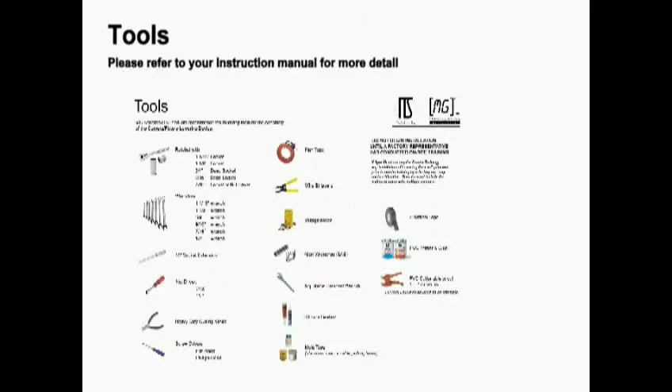MG2 and ITS Products recommends the following tools for the assembly of the camera fixture lowering device. More details on these tools can be found in the written instructional manual.

For the installation of the camera lowering device, you will need the following materials: the camera lowering device, or CLD for short, with the conduit mount adapter, the pole top junction box, the camera junction box, and 4 circular camera junction box weights. All 4 of these weights will be needed.

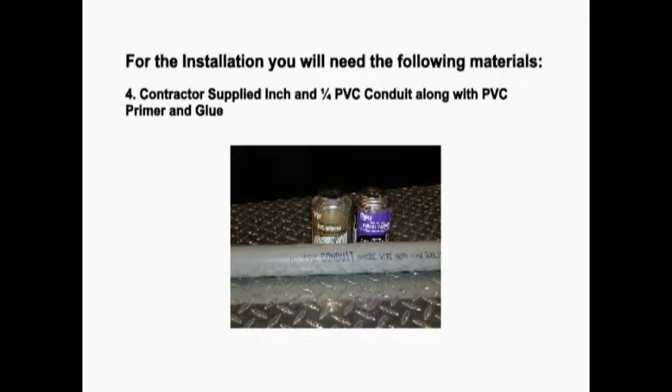The contractor supplied 1 1/4 inch PVC conduit along with PVC primer and glue. Power signal cable, either user supplied or the optional MG2 composite cable. The lowering tool winch will be needed to complete the full installation of the camera lowering device. And of course, a pole along with the pole top tenon and hardware.

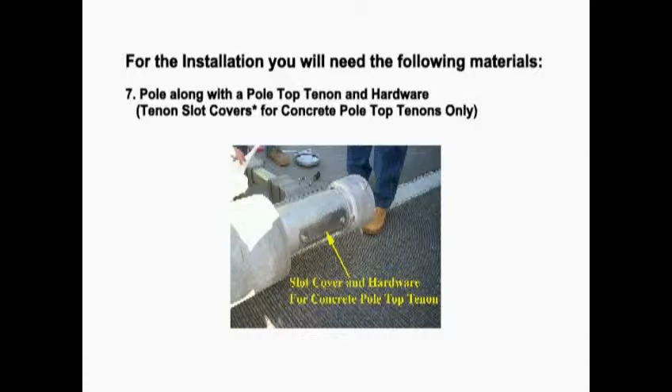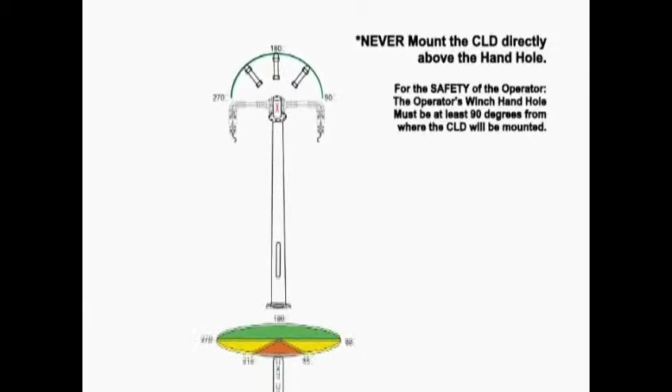Start with the pole in a horizontal position with the top of the pole ideally 3 feet off the ground. Please make sure that the handhole is accessible. Please note, never mount the CLD directly above the handhole. For the safety of the operator, the winch handhole must be at least 90 degrees from where the CLD will be mounted.

Take a look at this diagram for an example. Other pole-mounted equipment such as pole-mounted cabinets, detectors, antennas, RTMS, and other materials must be mounted keeping this safety requirement in mind. To start, let's bolt on the adjustable tenon.

Some tenons may come pre-installed. Be sure that all bolts are tight, and be sure that the tenon slot is aligned to the desired location in relation to the handhole. Here we'll see a field installation of a tenon to a concrete pole. Attach the 4 bolts and the included hardware from the pole manufacturer.

Tenons are slotted in order to give you many degrees of play. Assemble the 1 1/4 inch PVC conduit, the length from the handhole to the pole top, using PVC primer and PVC glue, and allow to dry.

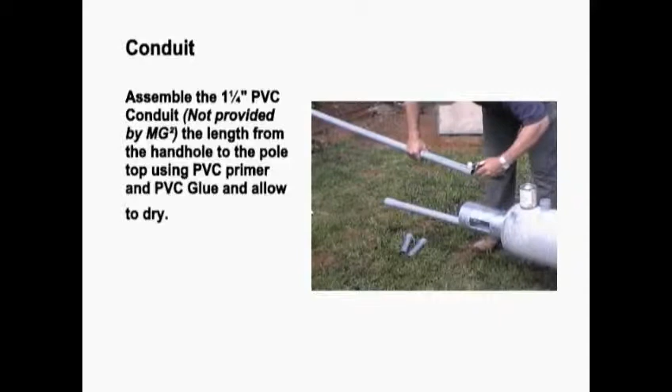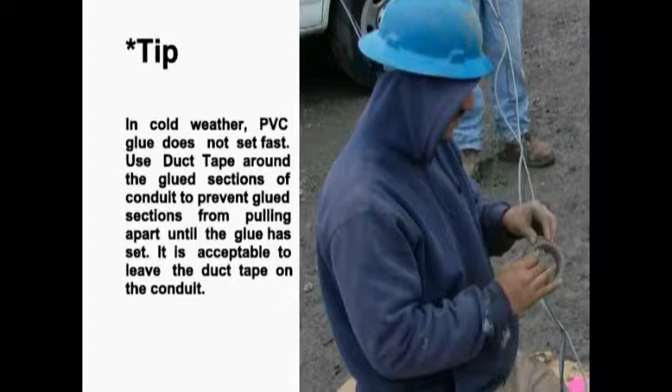Tip: in cold weather, PVC glue does not set fast. Use duct tape around the glued sections of the conduit to prevent glued sections from pulling apart until the glue has set. It is acceptable to leave the duct tape on the conduit. Assemble the provided 1 1/4 inch rigid conduit fitter to the top of one section of the PVC conduit using primer and glue. Allow to dry.

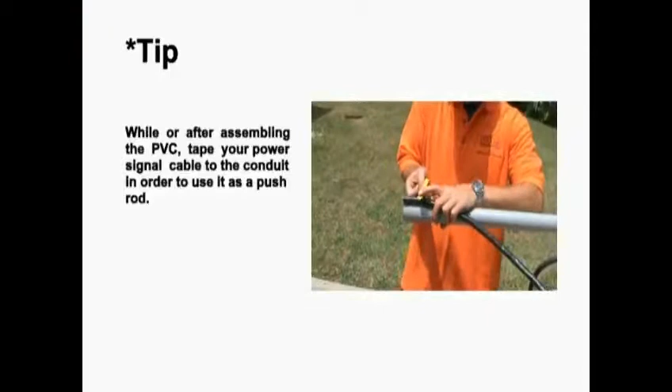It is not required at this part of the installation. However, while assembling the PVC, tape your power signal cable to the conduit in order to use it as a push rod. This will save a step later on in the installation.

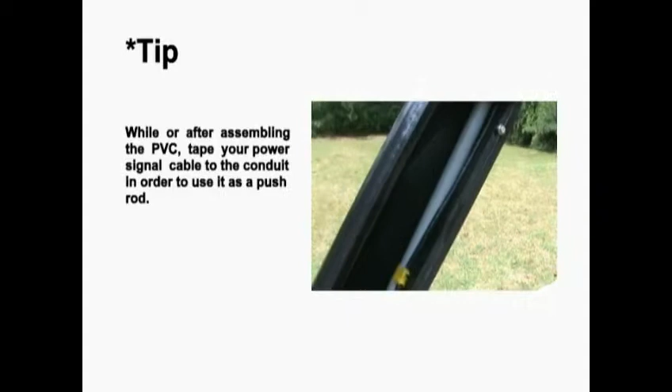Now, feed the conduit through the tenon and down towards the handhole. Continue feeding the conduit down the pole until the hole on the rigid conduit fitter is aligned with the bottom hole on the tenon with the slot.

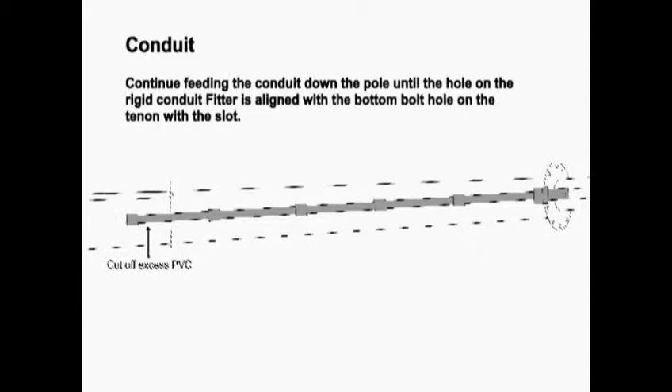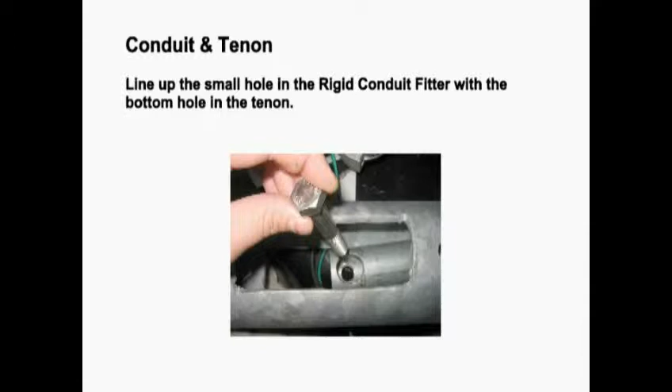Now remove the bolt, nut, and washer from the bottom hole of the CLD. Line up the small hole in the rigid conduit fitter with the bottom hole in the tenon. Temporarily attach the rigid conduit fitter to the tenon by inserting the bolt through the large hole on the fitter and securing with the bolt and washer.

Mark the conduit flush with the top of the handhole and cut off the excess PVC.

If a bell coupling was provided, glue the bell coupler onto the conduit.

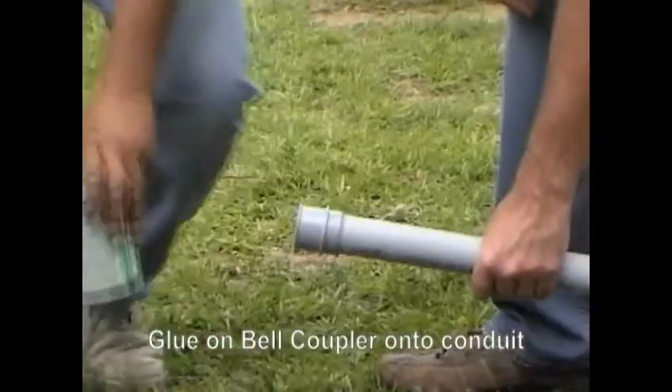Reinstall the conduit and temporarily reattach the rigid conduit fitter to the tenon by inserting the bolt through the large hole on the fitter and securing with the bolt and washer.

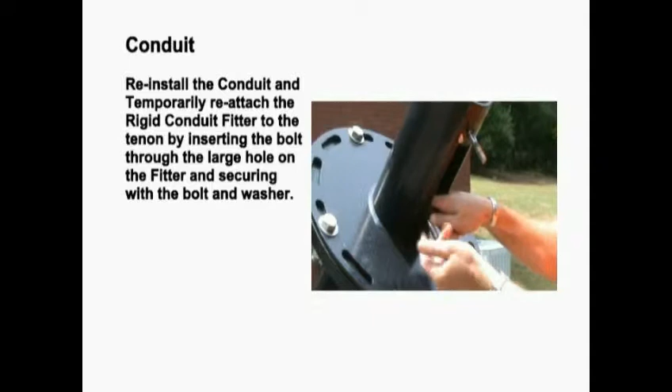Now it's time to fetch the CLD and place it next to the pole top tenon near the slot where the CLD will be mounted.

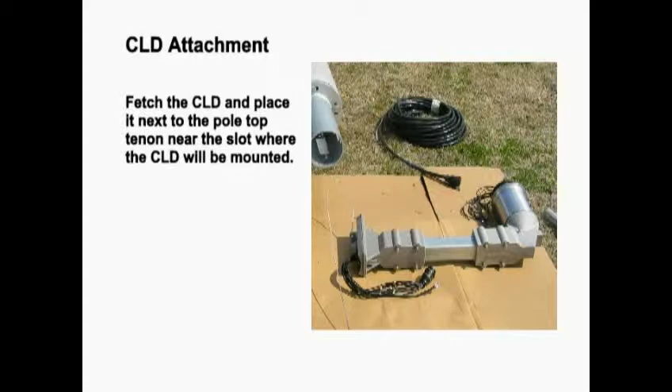Be sure to keep the CLD clean and clear of dirt and debris, which can foul the locking mechanism.

Locate the stainless steel cable attached to the CLD. Unroll the stainless steel cable in a hand-over-hand method to avoid curls in the cable. Curls or kinks in the stainless steel cable can prevent the device from functioning properly.

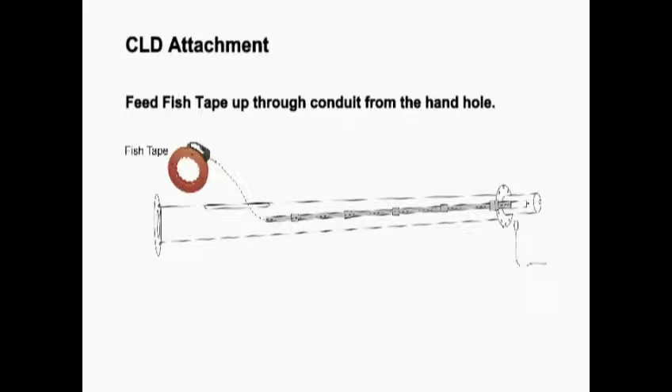Feed a fish tape up through the conduit from the handhole. Bring the end of the stainless steel cable back to the tenon and thread the thimble end with a quick link through the slot in the tenon and pull down through the fitter conduit. Remember, take the stainless steel cable through the slot in the tenon.

As the fish tape pulls the stainless steel cable down the conduit, it will be necessary to lift the CLD and begin to attach the arm to the tenon. While doing this, several procedures must occur.

Remove the nut, washer from the bottom bolt that is threaded through the conduit fitter tenon. Remove the top bolt, nut, washer from the CLD.

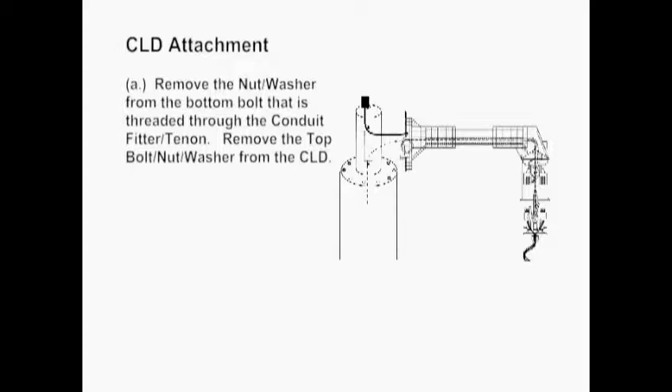Next, you will need to ensure the electrical conductors in the arm pass through the slot and out of the top of the tenon. You will attach the CLD to the tenon with the bolts provided. Bolts go on the inside of the tenon and nuts go on the outside of the tenon.

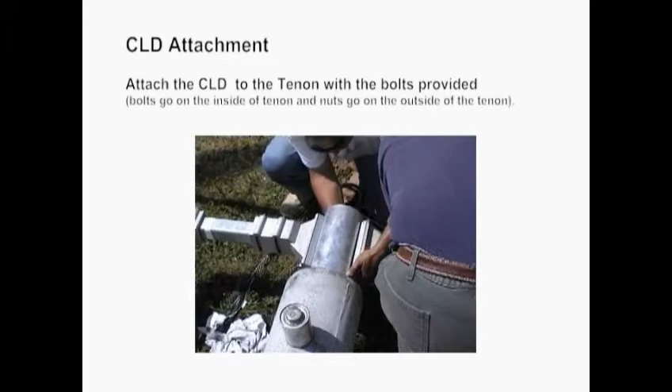Be careful not to pinch conductors or the stainless steel lowering cable.

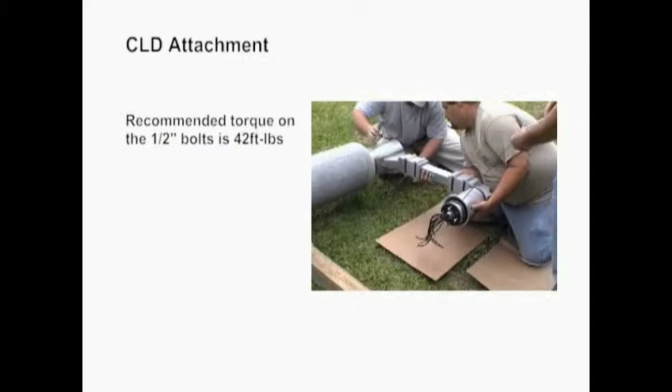Insert a finger through the pole top tenon into the conduit mount fitter and place it between the stainless steel cable and the bottom bolt. This will ensure that the stainless steel cable is not pinched behind the bolt.

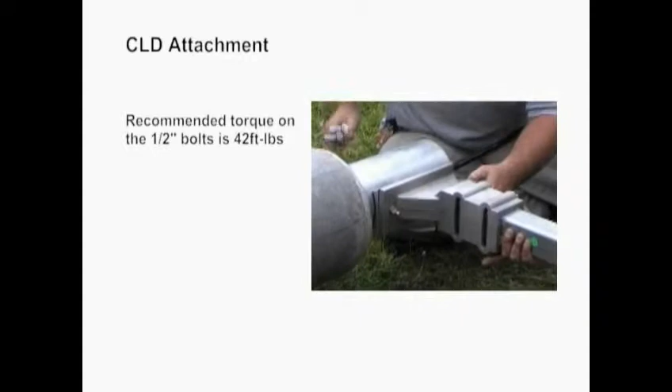Once the stainless steel cable is pulled through the conduit, immediately attach the quick link to the parking stand.

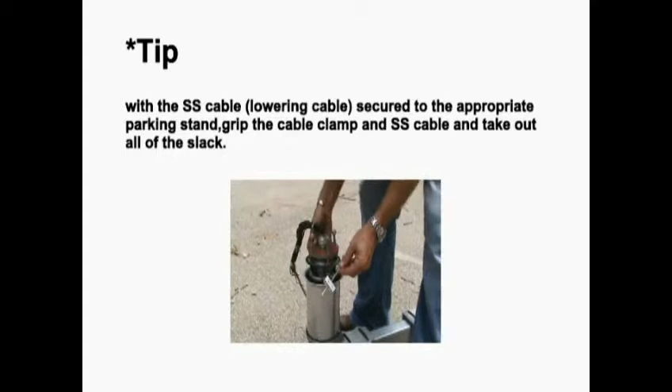Detach the bottom contact unit from the upper unit by pulling down on the contact and locate the cable clamp at the end of the stainless steel cable. With the stainless steel cable secured at the appropriate parking stand, grip the cable clamp and stainless steel cable and take out all of the slack.

With the slack out and slight positive tension on the lowering cable to keep it on the pulleys, push the bottom contact unit back into the bell until the rubber gasket around the bottom unit is in contact with the bell. It is not necessary to latch the unit.

If you have not already done so, remove the stainless steel cable from the fish tape once the CLD is attached and connect the quick link onto a parking stand. If using multiple CLDs, connect the quick link onto the parking stand located in the closest vertical plane as the camera lowering device orientation.

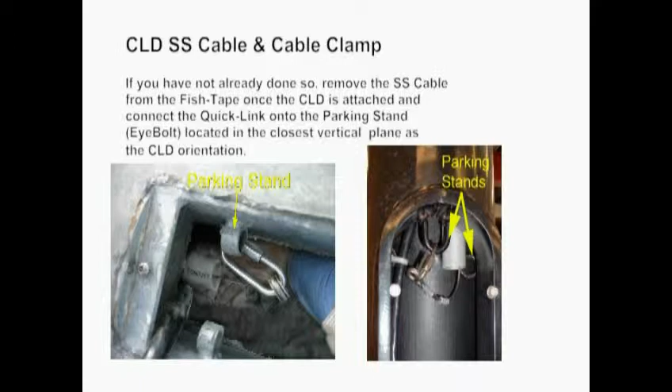Do not install the camera junction box until the pole is erected and set. Installing the camera junction box prior to setting of the pole may damage the alignment probe and void all warranties.

Now that the lowering device is attached to the tenon and the quick link is attached to the appropriate parking stand and secured, detach the bottom contact unit from the upper unit by pulling down on the contact and locate the cable clamp at the end of the stainless steel cable.

Grip lower contact with fingers and use thumbs to push against the bell housing to release the contact.

Units are shipped unlatched from the factory. However, if the contact unit is latched, you will need to push the contact unit up and then down to unlatch, and then pull the unit out. Please see the instruction manual for detailed information on this process.

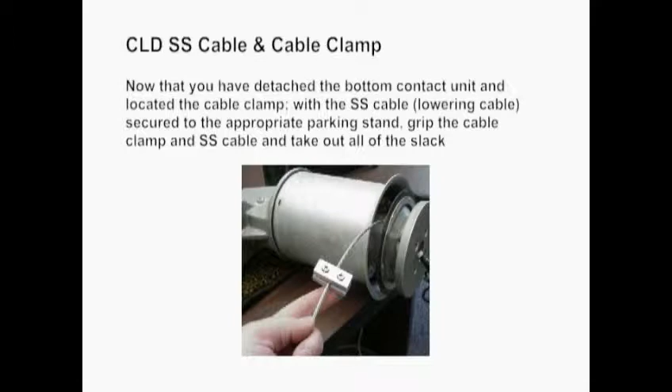Now that you have detached the bottom contact unit and located the cable clamp, with the stainless steel cable secured to the appropriate parking stand, grip the cable clamp and stainless steel cable and take out all of the slack.

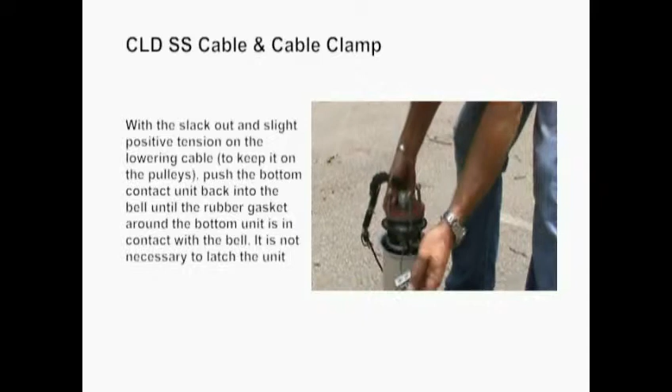With the slack out and slight positive tension on the lowering cable, push the bottom contact unit into the bell until the rubber gasket around the bottom unit is in contact with the bell. It is not necessary to latch the unit at this time.

During installation, never engage or disengage the lowering device without first maintaining tension on the lowering cable, either at the handhole or by pulling tension from the cable clamp.

Make up the non-slip safety knot to the clamping hardware as close to the bottom contact unit as possible to prevent excess cable slack. Wrap the stainless steel cable with electrical tape about 1.25 inches from the cable clamp before cutting the excess cable to prevent fraying. Cut the cable through the electrical tape.

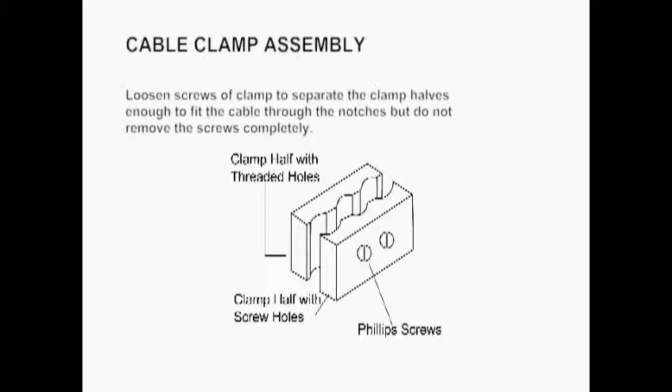Loosen the screws of the cable clamp to separate the clamp halves enough to fit the cable through the notches, but do not remove the screws completely. Feed cable coming from the bottom of the contact unit into the center notches of the cable clamp. Pull approximately 5 inches of cable through the clamp.

Insert the end of the cable through one of the side notches. Cable should move easily through the notches of the clamp. If the cable is too loose and moves out of the notches, tighten the screws slightly until the cable stays within the notches. Do not pull the cable tight.

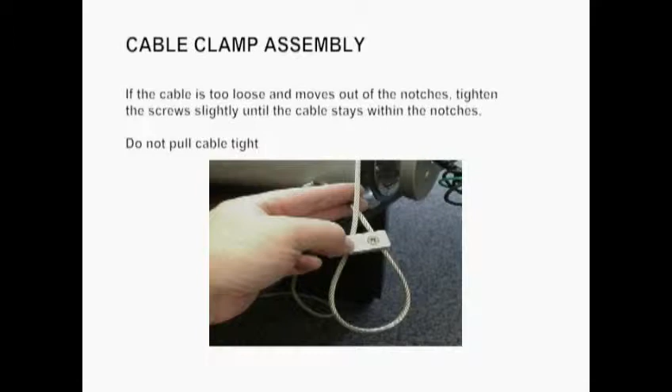Pass the end of the cable across to the other side notch and through the clamp. The end of the cable must be fed through the loop formed by the cable coming from the center notch and first side notch, so that when the cable is pulled tight, the loop closes on the end portion of the cable.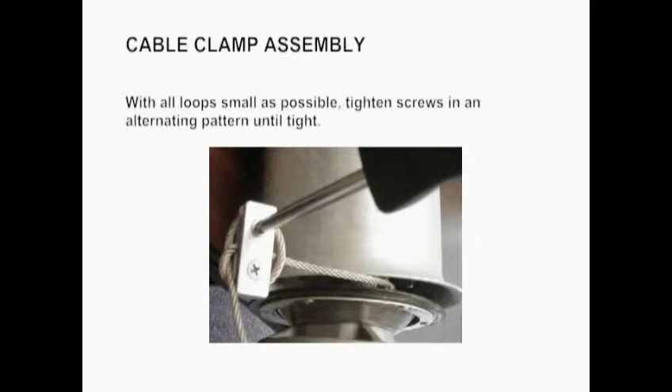Carefully pull the cable loops tight by pulling back on the cable portion coming from the disconnect unit. Be sure the cable remains within the notches of the clamp. With all loops as small as possible, tighten the screws in an alternating pattern until tight.

After wrapping with electrical tape, trim the cable end as necessary, leaving about 1/2 inch to 1 1/4 inch protruding from the knot.

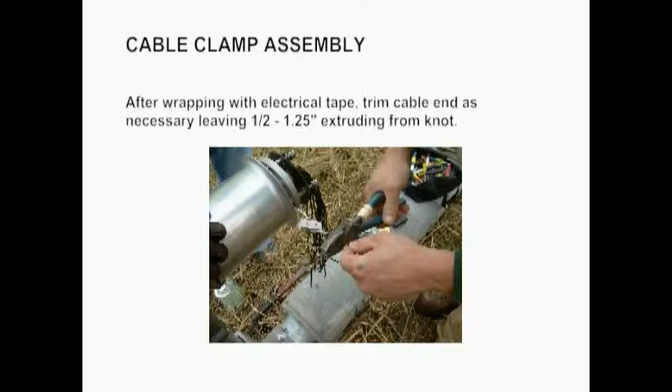Insert the cable clamp into the slot of the bottom contact as shown here. Once again, it is important that the clamp fits into the bottom contact slot as pictured.

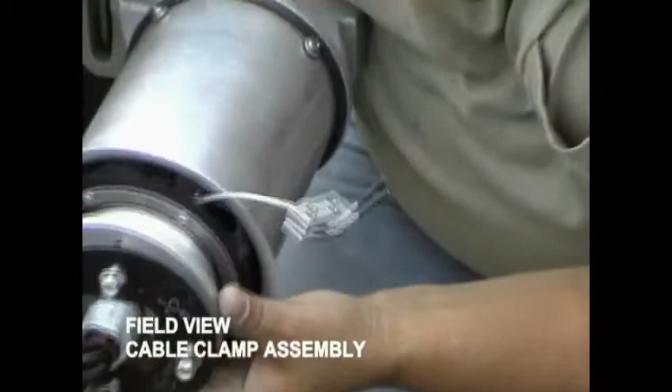Warning: to prevent serious personal injury, the cable clamp must be properly assembled and the cable must be properly routed through the clamp as specified. No attempt at lifting any load should be made until all specification conditions are met. Please refer to the instruction manual for more details regarding the cable clamp assembly.

Do not lift people or operate any lowering system over people. Never stand directly below the lowering device during operation.

The length of the lowering cable is crucial to the proper and safe functioning of the camera lowering device. If the cable is too long, the hardware on the portable winch will get caught in the pulley on the winch frame, not allowing the camera lowering device to latch or unlatch. If the cable is too short, it will be difficult to attach the lowering cable to an available parking stand located on or inside the handhold.

By attaching the lowering cable to a parking stand during installation, pulling out all slack, and assembling the cable clamp as close to the bell housing as possible, this will typically give you the desired length of cable to properly latch and unlatch the device.

However, the proper length cannot be confirmed until after the pole is erected, camera junction box attached, and the unit operated. Final adjustments, if necessary, can easily be made at ground level following the procedures discussed in the installation instruction manual.

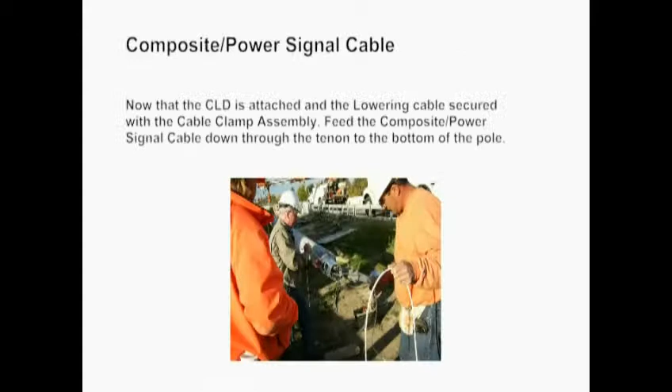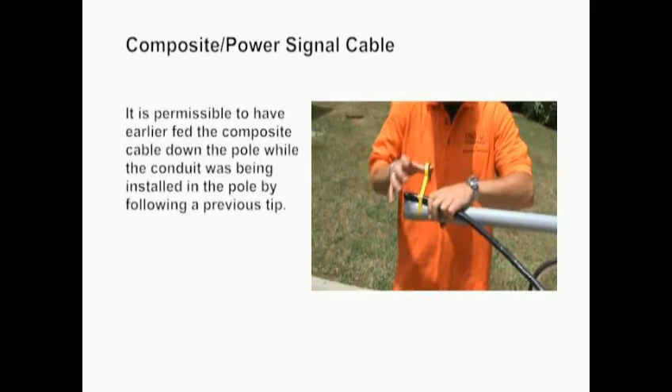Now that the camera lowering device is attached and the lowering cable secured with the cable clamp assembly, feed the composite power signal cable down through the tenon to the bottom of the pole. It is permissible to have earlier fed the composite cable down the pole while the conduit was being installed, by following a previous tip on this instructional DVD.

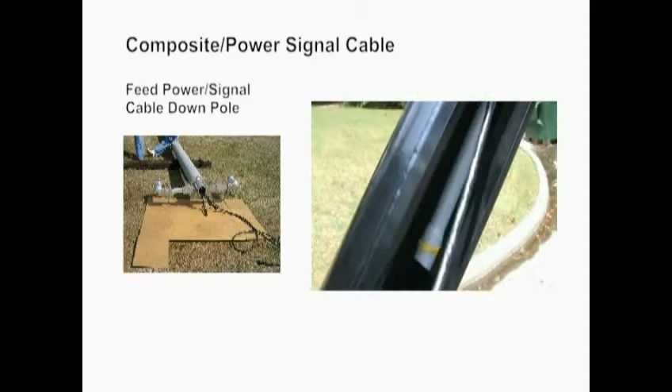Unroll composite cable hand over hand to avoid kinks. Feed the power signal cable down the pole. If using pre-wired composite cable, simply plug in the connectors.

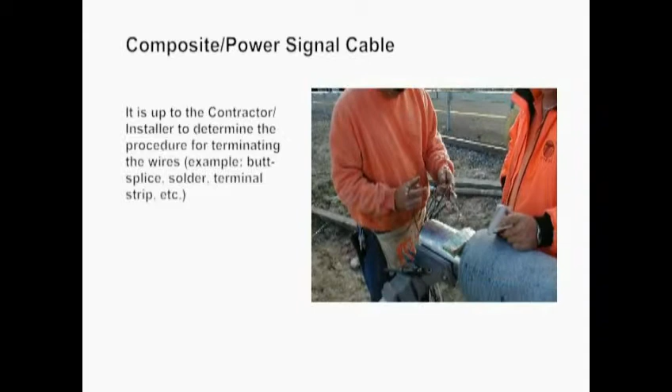For non-pre-wired systems, terminate the numbered CLD leads to your desired wire for camera control, power, and video. It is up to the contractor or installer to determine the best procedure for terminating the wires. Be sure to make a record of your wiring diagram for later reference.

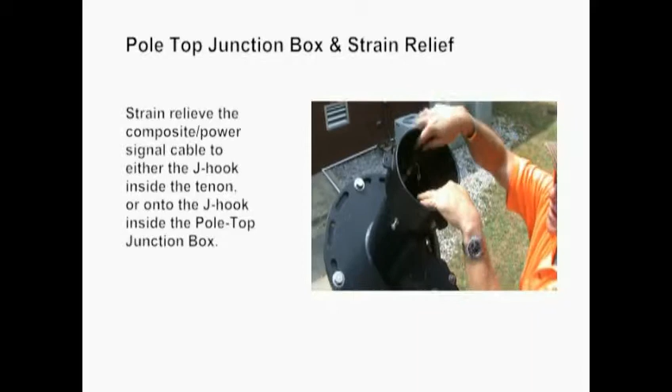After terminating all conductors and wires, secure the pole top junction box to the tenon. Strain relieve the composite power signal cable to either the J-hook inside the tenon or onto the J-hook inside the pole top junction box. Secure the strain relief to the J-hooks to prevent it from releasing during pole installation. Adjust the strain relief so that all cable conductors fit inside the pole top junction box. Keep power signal cable clear from the lowering cable and rear pulley.

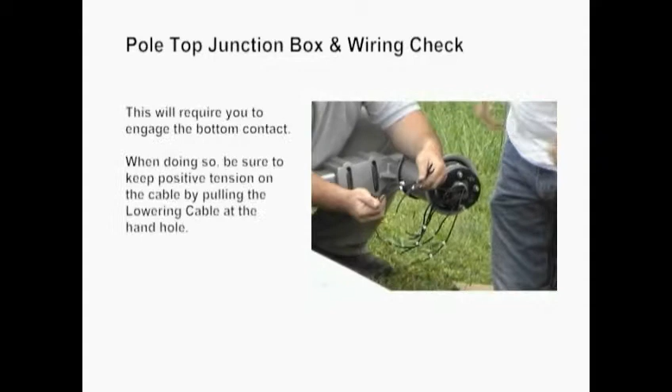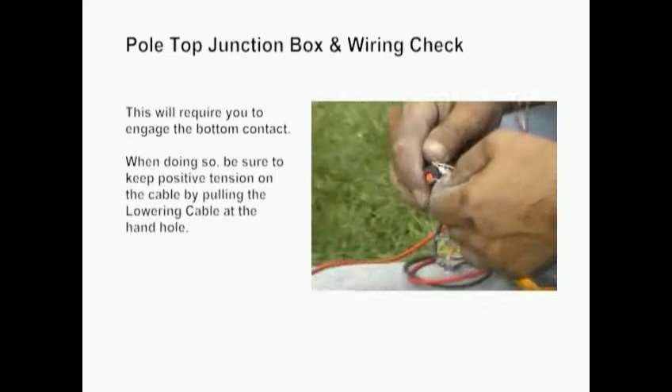Before erecting each pole, check all conductors and leads for continuity to verify clean signal throughout each utilized pin. This will require you to engage the bottom contact unit. When doing so, be sure to keep positive tension on the stainless steel cable by pulling the lowering cable and keeping tension from the hand hole. With continuity confirmed, secure the lid of the pole top junction box.

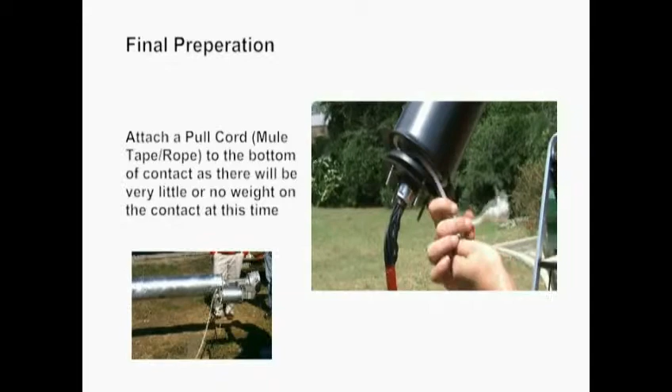Disengage the bottom contact unit and leave it in the unlatched position to place positive tension on the cable until the pole is raised and set. Attach a pull cord to the bottom of the contact, as there will be very little or no weight on the contact at this time. The pull cord will help guide the bottom contact near the hand hole once the pole is erect.

Once again, do not install the camera junction box until the pole is erected and set. Installing the camera junction box prior to setting of the pole may damage the alignment probe and void all warranties.

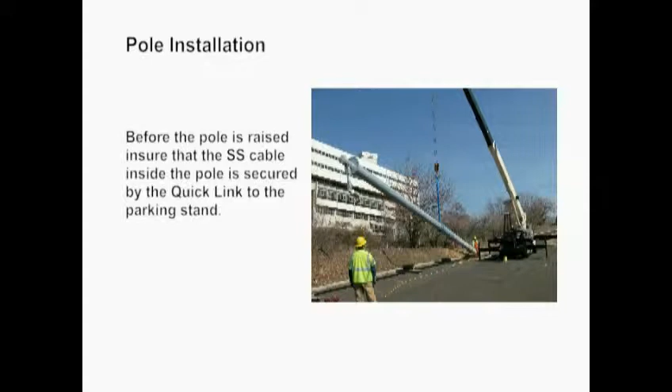Before the pole is raised, ensure that the stainless steel cable inside the pole is secured by the quick link to the parking stand. Raise the pole using care not to allow the arm to come in contact with the ground or the lifting hoist. Secure the pole to the foundation. The pole must be installed plumb for the lowering device to function properly.

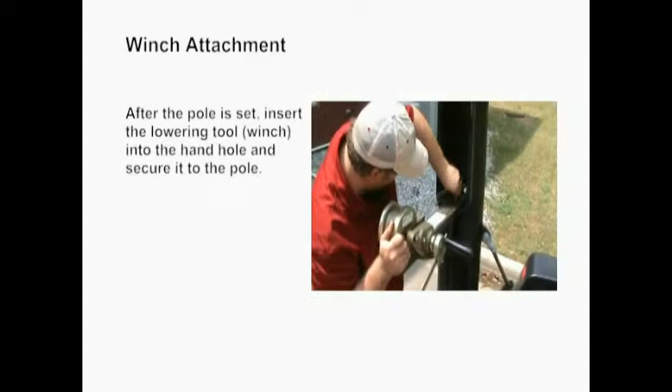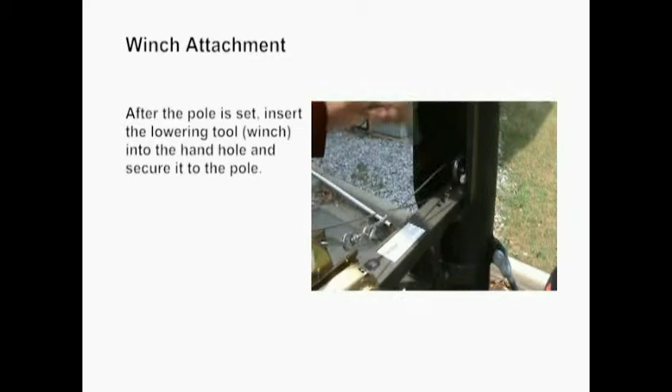After the pole is set, insert the lowering tool into the hand hole and secure it to the pole, attached to the winch handle as seen here.

Feed the winch cable up and attach the winch cable to the teardrop eyelet of the lowering cable, using the quick link while leaving the lowering cable attached to the parking stand. Make sure that the threads of the quick link are completely engaged.

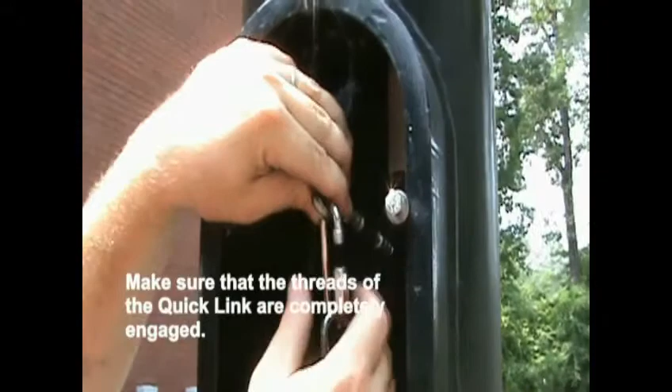Once the winch cable is secured to the lowering cable, detach the lowering cable from the quick link that is attached to the parking stand.

Warning: to avoid serious injury or death, the lowering cable shall always be attached to either the parking stand, winch cable, or both. Never detach the winch cable until the lowering cable is reattached to the parking stand.

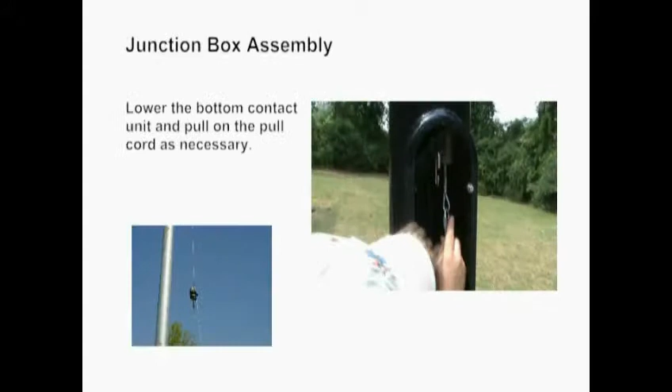Lower the bottom contact unit and pull on the pull cord as necessary.

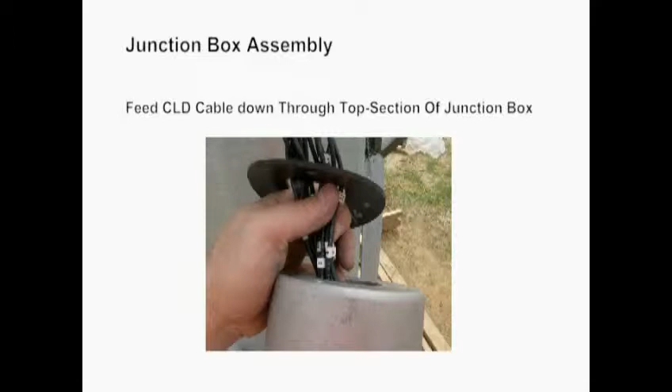Attach the camera junction box to the 4 bolts coming from the bottom contact. In order to do that, first unhinge and remove the top half of the camera junction box. Feed the CLD leads down through the top section of the camera junction box. Using a 7/16 wrench and a 7/16 nut driver, attach the junction box to the camera lowering device with the included bolts, nuts, and washers. Reattach the bottom side of the hinge box to the top side and secure it with the included nut.

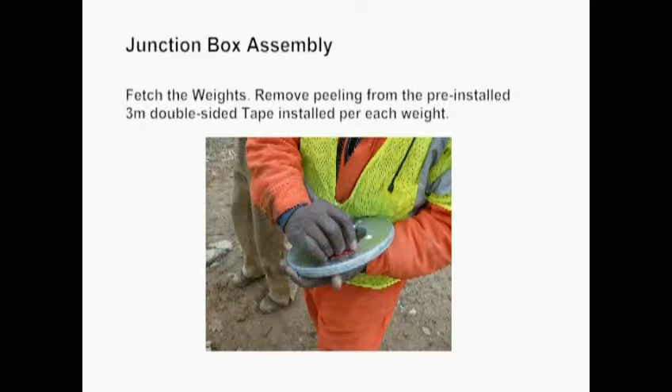Fetch the 4 weights. Remove the peeling from the pre-installed 3M double-sided tape installed per each weight. Carefully guide the weights onto the top of the junction box with the notches facing up and indentions down, and rotate each weight to match the indentions with the notches in order to keep the weights from rotating.

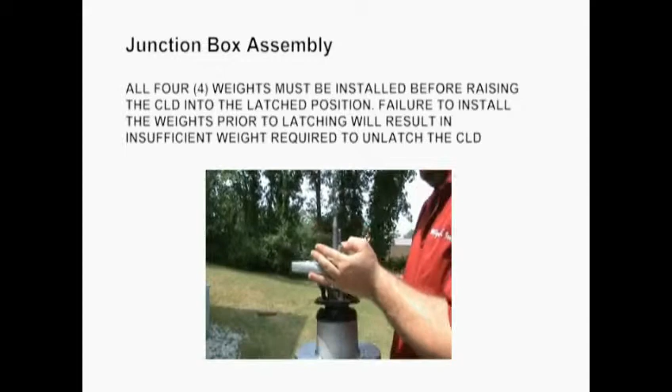All 4 weights must be installed before raising the camera lowering device into the latch position. Failure to install the weights prior to latching will result in insufficient weight required to unlatch the camera lowering device. Dome cameras will simply screw into the 1.5 inch NPT tapped hole in the bottom of the camera junction box.

Once again, all 4 weights must be installed before raising the camera lowering device into the latch position.

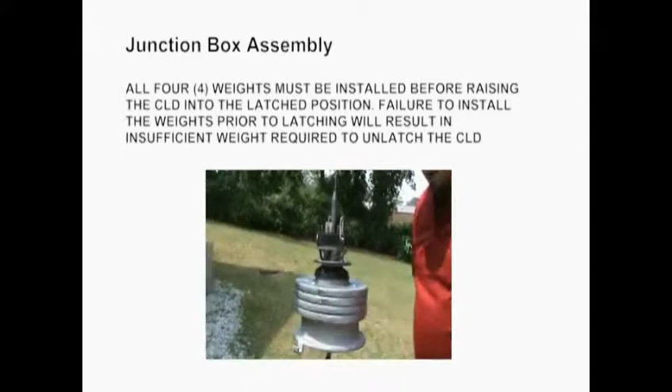Attention must be paid throughout the raising and lowering process to prevent bunching of the wire rope on the winch. The winch should be oiled prior to each use according to the recommendations in the winch manual. A heavy-duty gear oil is acceptable. Never oil the winch with WD-40, brake fluid, or hydraulic fluid. For your safety, never stand directly below the unit when raising or lowering.

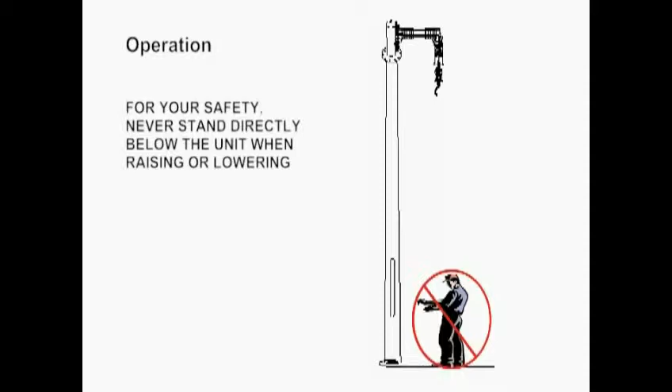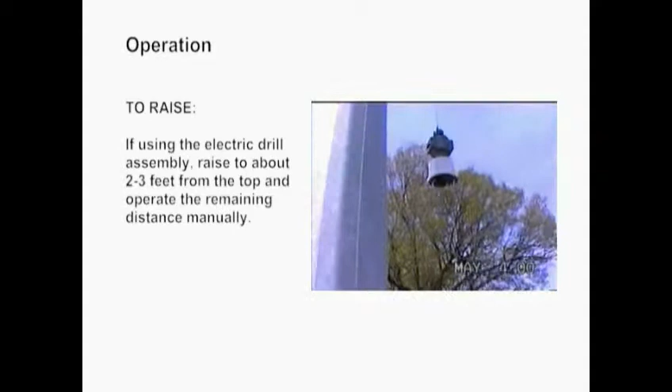To raise, simply raise the camera or fixture by cranking the winch. If using the electric drill assembly, raise the camera to about 2 to 3 feet from the top and operate the remaining distance manually. It is important to always disengage and re-engage the device by using the manual handle only.

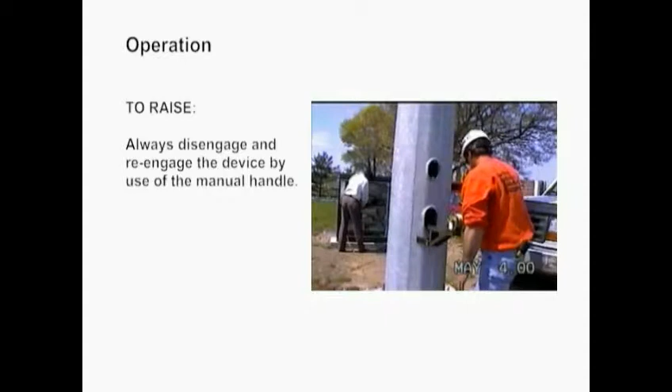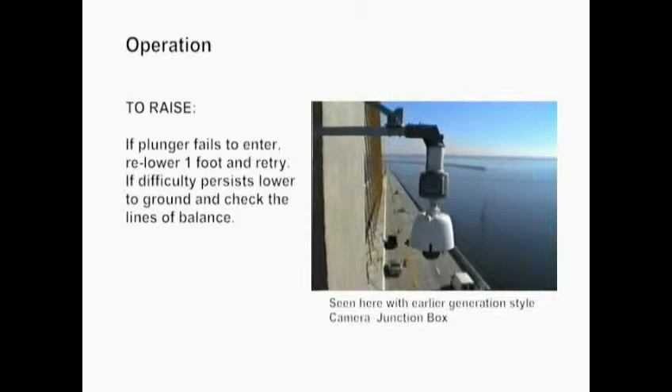When winding the unit up, use caution the last foot as guide pins are aligning. If the plunger fails to enter, re-lower 1 foot and retry. If difficulty persists, lower to the ground and check the lines of balance.

When the movable parts are hard home, indicated by obvious resistance while attempting to crank the winch, release tension by cranking in the opposite direction, then crank down 1 or 2 turns of the handle to lock in the suspension cams. Slack will be visually confirmed in the cable, indicating the device is properly latched at the top.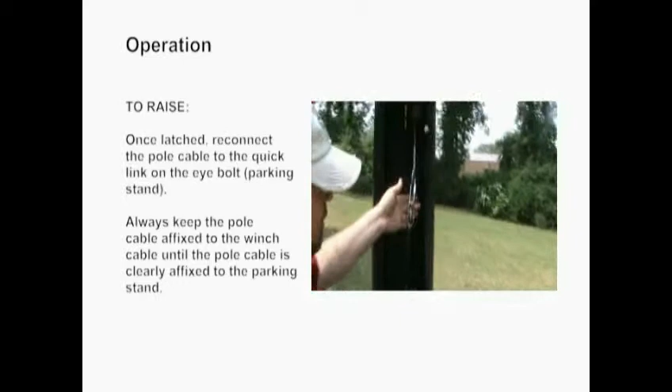Once latched, reconnect the pole cable to the quick link on the parking stand. Always keep the pole cable affixed to the winch cable until the pole cable is clearly affixed to the parking stand.

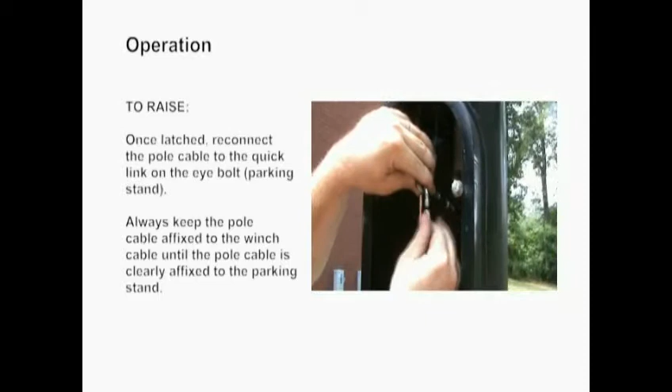Remember, the pole cable must always remain attached to either the parking stand and the pole, the winch cable, or both. Do not allow the lowering cable to hang unattached inside the pole. Note: always check that the lowering cable is slack before you leave it. You then know that the fitting is suspended by the unit and is not hanging on the cable.

Unfasten the winch from the pole and place the handhold cover back on the pole.

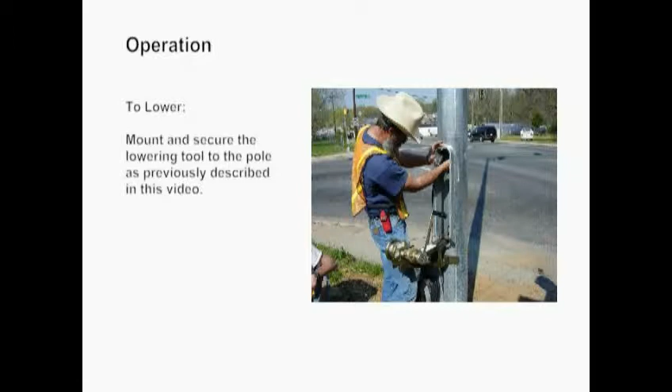To lower, mount and secure the lowering tool to the pole as previously described in this video. Just as before, feed the cable from the winch up to the pole cable coming down the pole.

While the pole cable remains attached to the eye bolt, aka parking stand, attach the winch cable to the pole cable eyelet using the provided quick link connector. The quick link must be completely screwed shut before any pressure is applied. There should be no tension in the pole cable at this time.

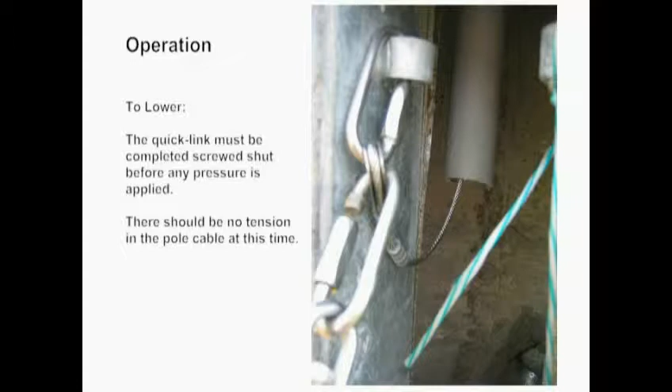The operator should feel resistance in the hand crank as the movable portion of the disconnect unit travels upwards to the top of the locking maze as it prepares to disengage. Then turning the handle in the opposite direction lowers the movable part of the suspension unit straight down.

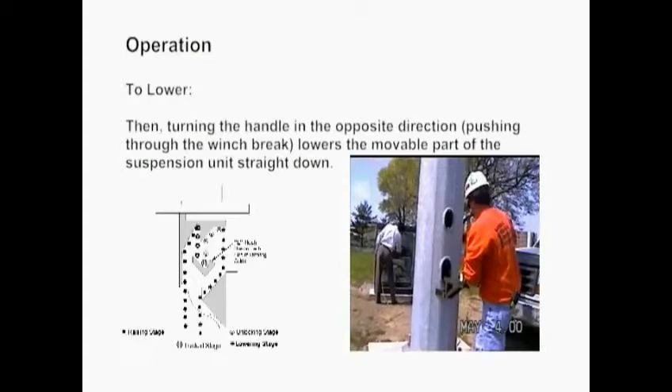Be sure to guide the quick link, lowering cable, and hardware crimps past the lip and into the conduit.

Once the unit is unlocked or disengaged, turn the winch handle the opposite direction to begin to lower the camera. There may be slight resistance as you push back through the braking mechanism on the winch.

If you are unsuccessful in your first attempt to unlock or disengage the unit, repeat the process and slightly increase your tension when turning the handle in the lift direction.

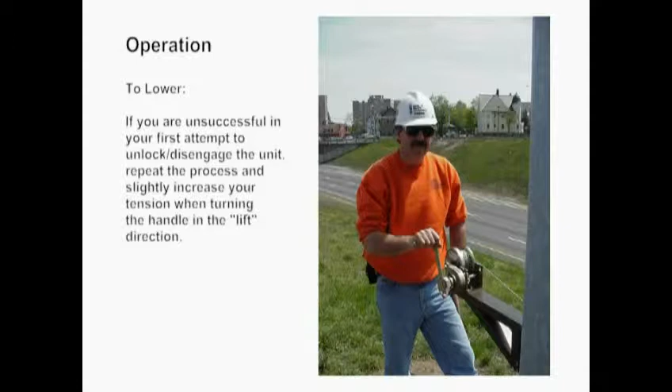If utilizing a factory-provided electric drill motor and clutch assembly, first lower the camera fixture 2 to 3 feet manually before attaching and operating the variable speed drill. You should operate your drill at the low setting.

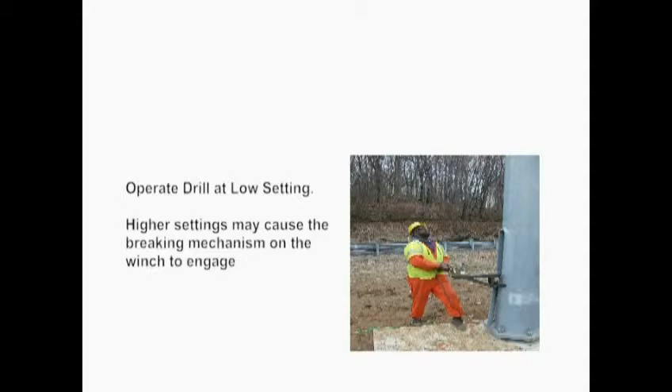Operating at higher settings may cause the braking mechanism on the winch to engage. Never engage or disengage the lowering unit with the drill motor. Always engage or disengage the lowering unit using the manual handle.

Lower the camera to your desired height for maintenance. It is recommended not to lower the bottom contact below the top lip of the handhold.

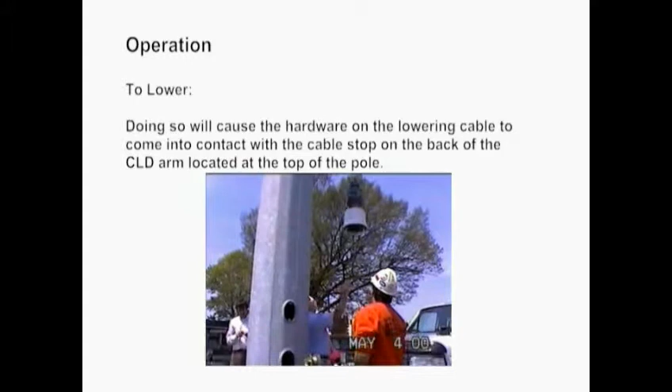Doing so will cause the hardware on the lowering cable to come into contact with the cable stop on the back of the camera lowering device arm located at the top of the pole. This will cause slack on the cable and may result in the hardware wedging into the cable stop, making it difficult to release.

If you notice slack on the winch cable after you've lowered your camera, turn the winch handle in the lift direction until the slack is removed and tension is back on the lowering cable.

Warning: for your safety, never stand directly below the unit when raising or lowering.

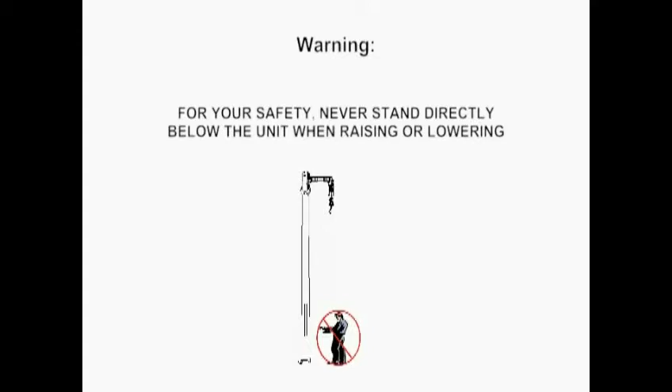This concludes the video portion of the installation instruction. This video is to be used in conjunction with the written manual and should not be viewed without first reading the written manual. You will find additional details in the written manual regarding installation, operation, and maintenance of the camera lowering device.